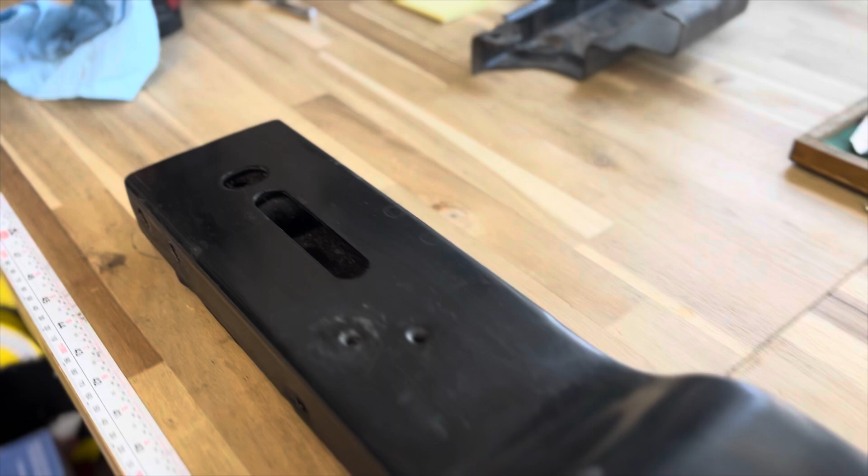Watched our first video in this little project? You might have remembered that I mentioned the center line of this cross member and where it lies in the frame is about 3 inches shorter than the Coyote truck that Jazz had over here. We measured off a known point, since the suspension on those trucks is interchangeable, off the front welded sub cross member to the center line of this. It was 30 inches on the 08, and it was 33 on the Coyote.

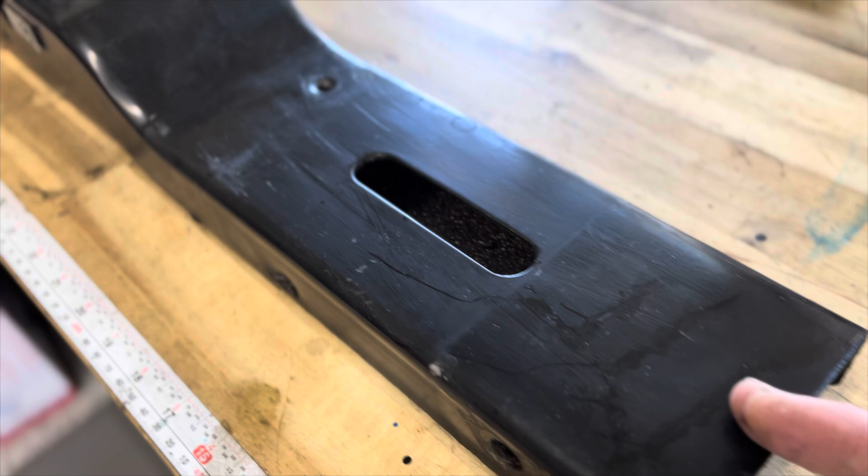Christian from Power by the Hour also verified a customer of his that swapped one of these trucks as well, had to do some cross member work. So obviously this is actually 4 inches, so if we go from center line, we're going to be out here.

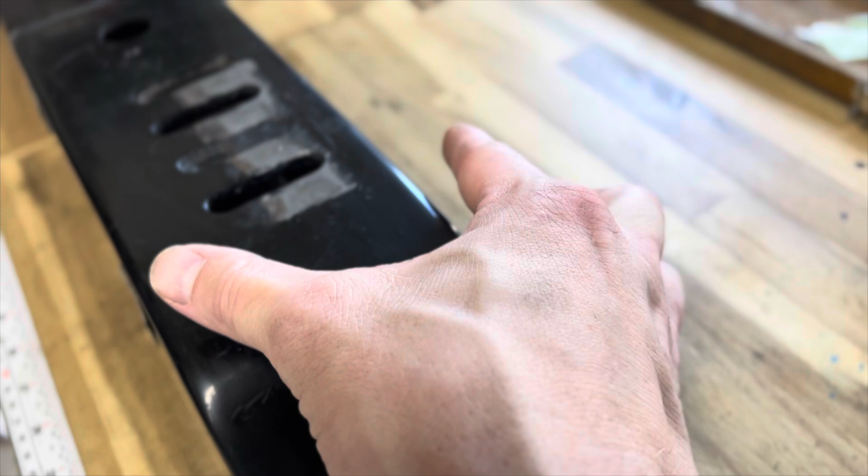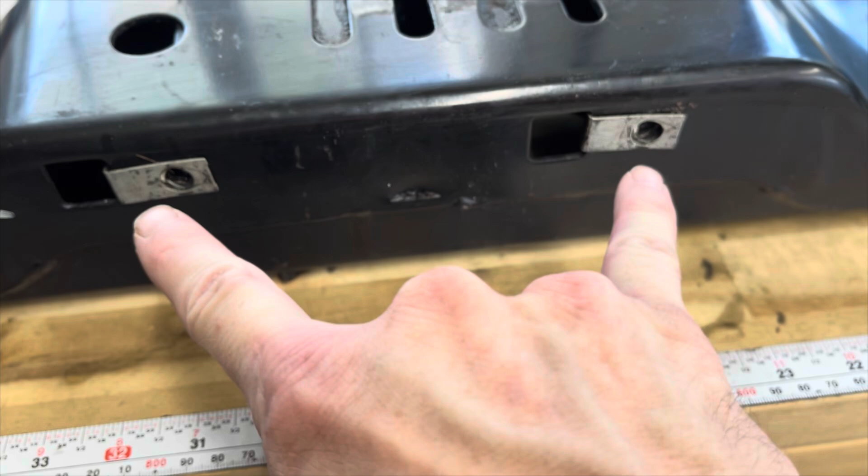Originally I was thinking about making a whole cross member, but then you have your exhaust shields that bolt here and your exhaust brackets that bolt there. So I'm thinking of a simple design, a plate here to extend the back of this. Actually, this is the back.

So we're gonna have to work around the exhaust and do that. I'm gonna scan it and see if I can't come up with a simple bracket to get some mounting points back here for you guys to have this swap just a little easier. Let's get to scanning.

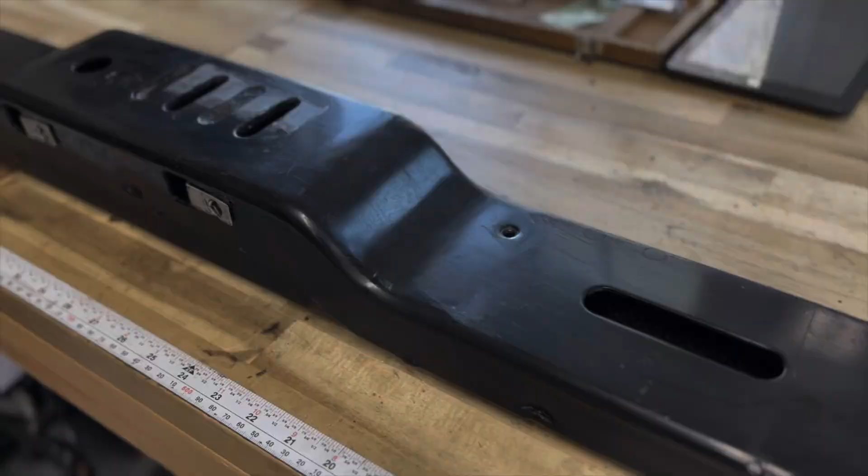So I took my crude scan using my phone, as you saw there, to get kind of a base solid for the original transmission cross member. As you can see, filling in there, I took hard measurements too with the caliper.

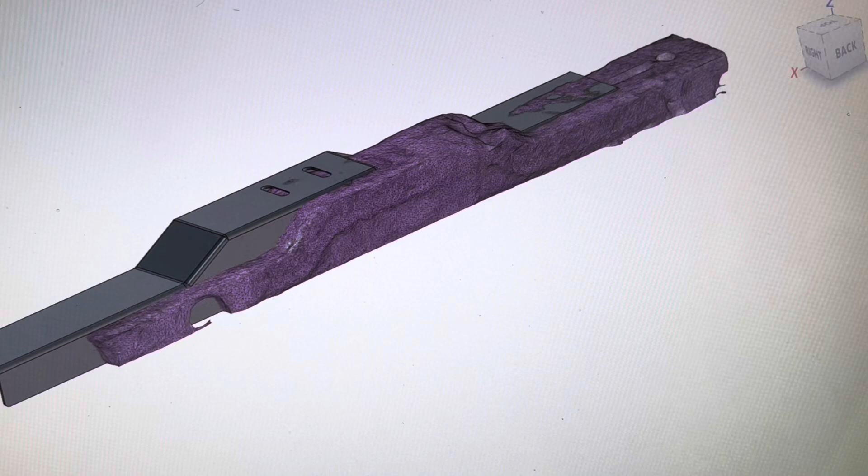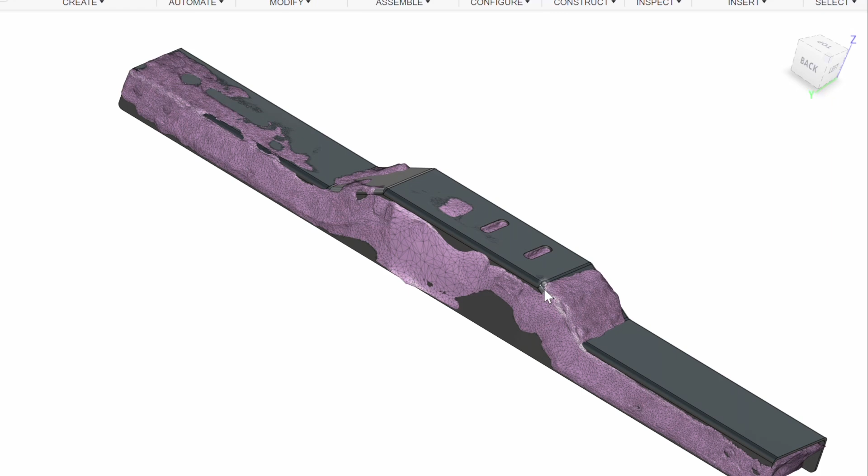So I actually did a screen grab on the computer, which is a little better than the phone. As you can see, a little better view of the representation, a little cleaner than the scan. And also here, we'll show the overlay of the scan model and zoom in on where you can see the J-clip that you might have noticed in the video.

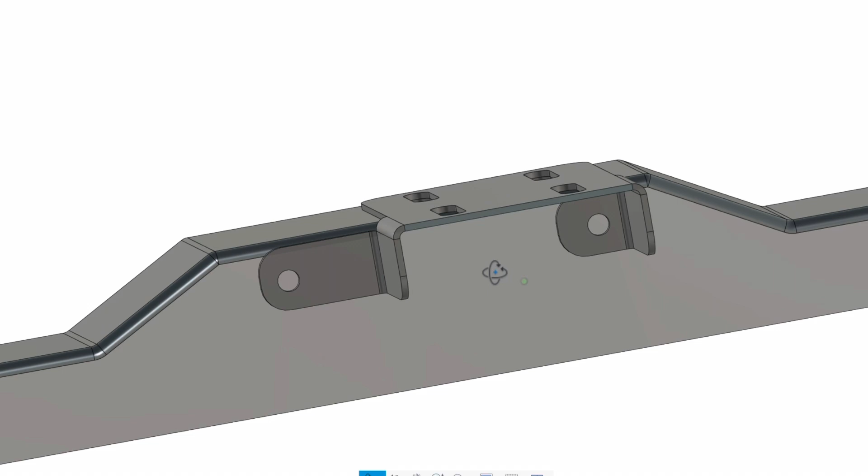So I decided to utilize those J-nuts in the back as a mounting point, and you can see me build the first revision of the transmission mount. Then after I built it alongside of the solid transmission cross member, I put it on there, and you can see kind of where it all fits up.

And it should be - at this point I didn't know that the exhaust bracket was going to be in the way, but we'll get to that later. All right, after a few hours or so during the day, I found to get that thing designed, as you saw, and made myself a paper template.

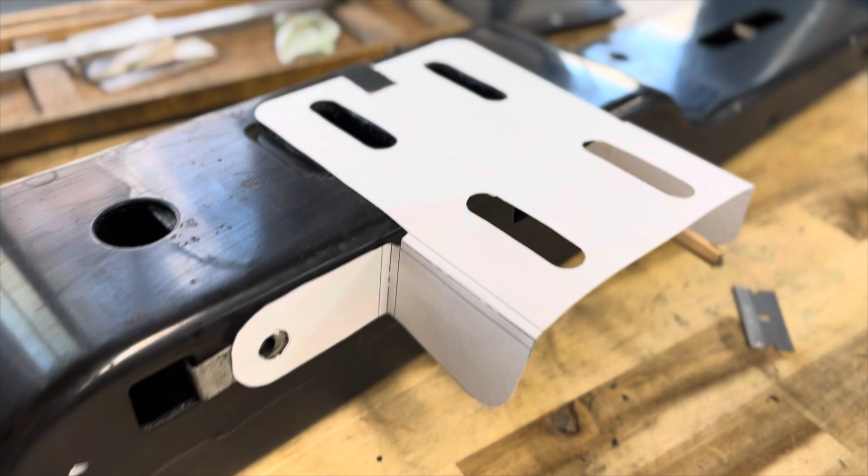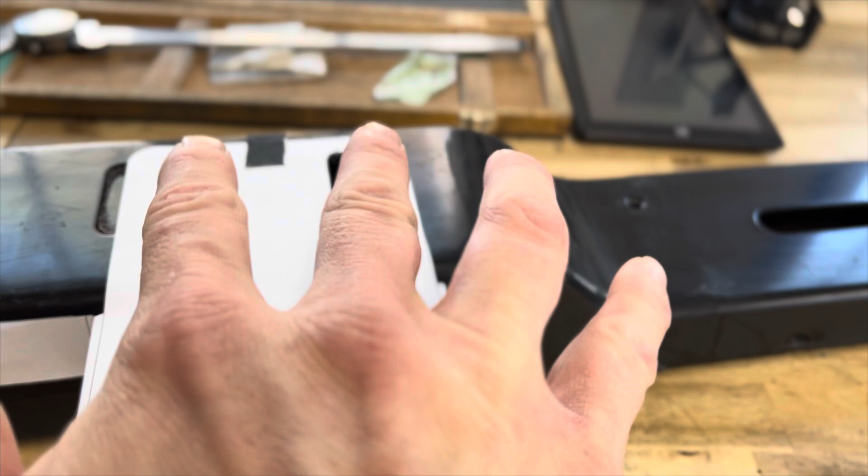So pending, I'm gonna buy a 6R80. I like to buy a 4-wheel drive mount too, just to see if the studs are the same, but I feel like it's pretty common - just looking at the cross members of the 09 to 14 F150s, these look the same, but you never know until you try.

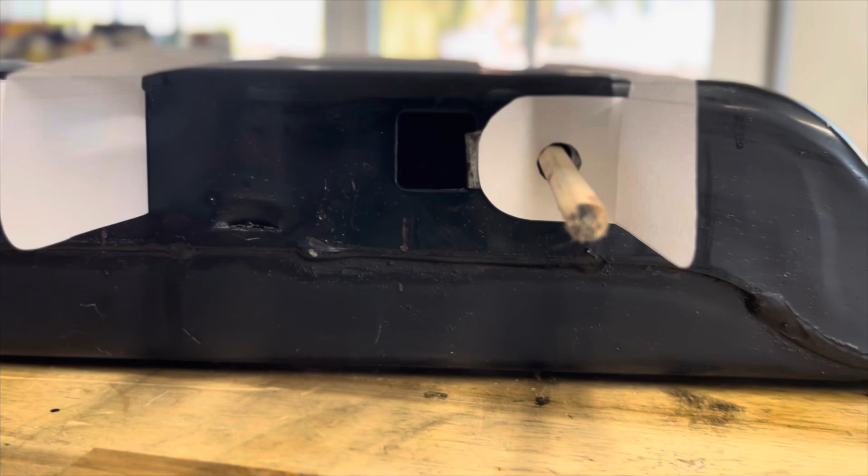And it looks like the 04 to 05s have an insert in here instead of a J-nut, and looks to be in the same position. I'll probably make that a little bigger just to make sure, but that's where the exhaust hanger is usually bolted to, so I'm hoping the slots are big enough, kind of sandwich it.

I gotta go double check and look at that piece to see what that looks like, whether it can be bolted - maybe, hopefully that won't be in the way, or it can be sandwiched between the cross member and the mount. So that's offset a little more than three inches, because otherwise the studs encroach in this and are basically useless.

So yeah, that's my little solution pending actuality. So that's, I think, a good starting point on that. Been told 3-valve mounts work, like I said in the other video. So that's pretty cool. Let's go take a peek at that exhaust hanger bracket and see if it's gonna be in the way or we can sandwich it.

So yeah, I want to double check the newer cross members, because I'm not sure what you're going to do with exhaust yet, but definitely can't sandwich that exhaust bracket in between here.

So I might just have to - because it's going to have to lay flat and it sticks out real far, like it's ribbed and all that stuff - it's going to have to be redesigned of sorts, but we'll just kind of go with this for now.

I do think I might be able to get away having this behind it, and this being sandwiched in between the exhaust bracket, making clearance here for it one way or another, or doing some creative bending. This side might be okay. I think it's this side.

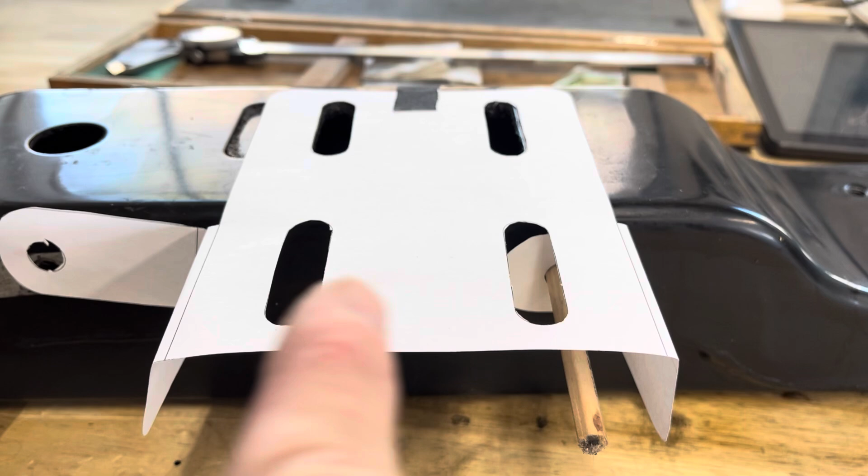Maybe just omit that side and then it'll all be kosher. Then you get into the area of the studs from the relocated transmission mount getting interfering. So I'm not gonna make any metal things yet until I kind of see where everything falls into place. All right, I decided just to grab that thing off. It's only held by one hanger.

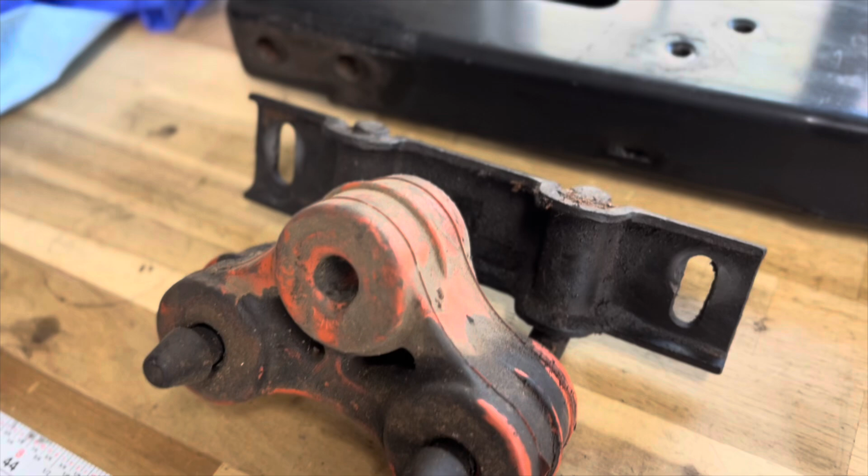Definitely gonna have to modify the design a little bit. Like I said, this side will be definitely okay. That side, definitely not. I gotta see if this thing goes in like that or that, because gravity did its thing and it was hanging like that out of the truck. But if it's like this, perfect, because then I'll just make a flange, extend it over here, and then have a bend down there to have it be sandwiched in between the exhaust hangers. So let's go see how that thing hangs.

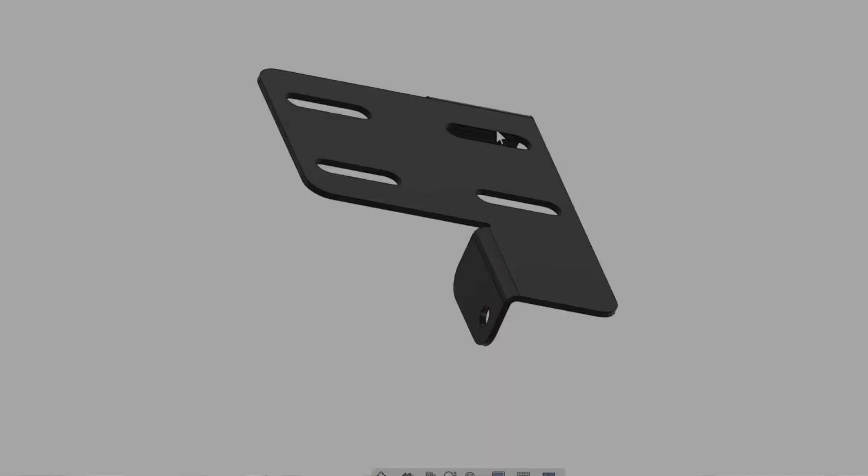If you ever try and find something the way it is on YouTube or anywhere else and you just can't find it, let me show you how I figured out that these are actually down on the truck, and all I have to do is modify that flange. So I'll update that and then show you a new piece of paper, so I don't go through a step-by-step process.

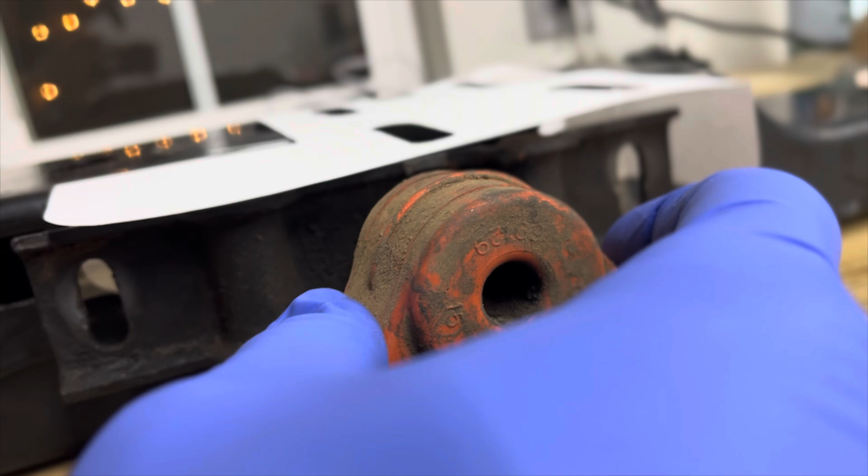If you know CAD, you know CAD. If you don't, time to learn. As you can see, made a pretty simple modification there to have that flange go down and behind against the cross member. And just like that, we got our revised paper template, and the mount should fit under there just ever so nicely.

Got some action down there. Now, hopefully your stud doesn't come too close to there. It should land somewhere in the middle there in the slot. And there's still, you can get to it with a wrench. So I think that's a success.

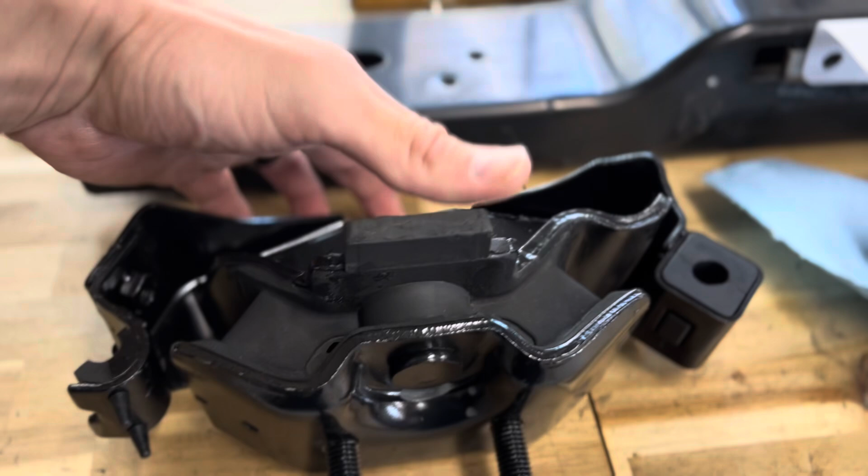Not too bad. All right, I went ahead and got a transmission mount from a 6R truck, 2-wheel drive, because that's what we're gonna swap it into. It'll sit in there like that, and oh, it looks a little tight. So this is the same slot as the factory ones up here. Nope, it's gonna have to be a little skinnier. So the bolt spacing is gonna be just a little narrower.

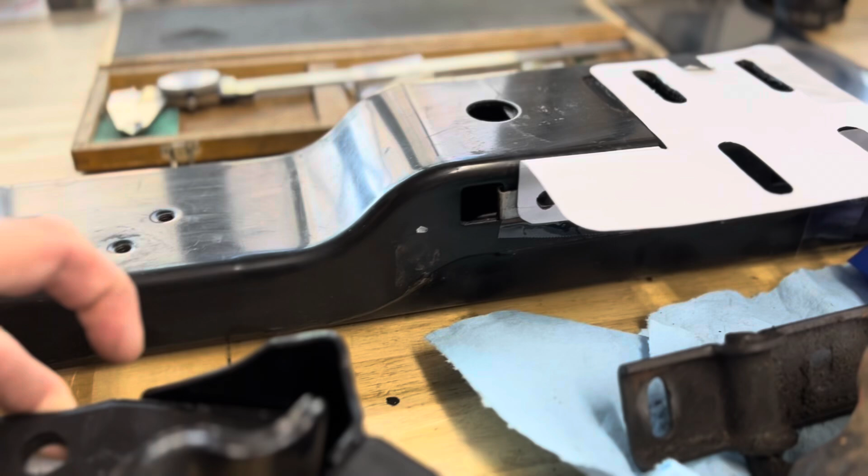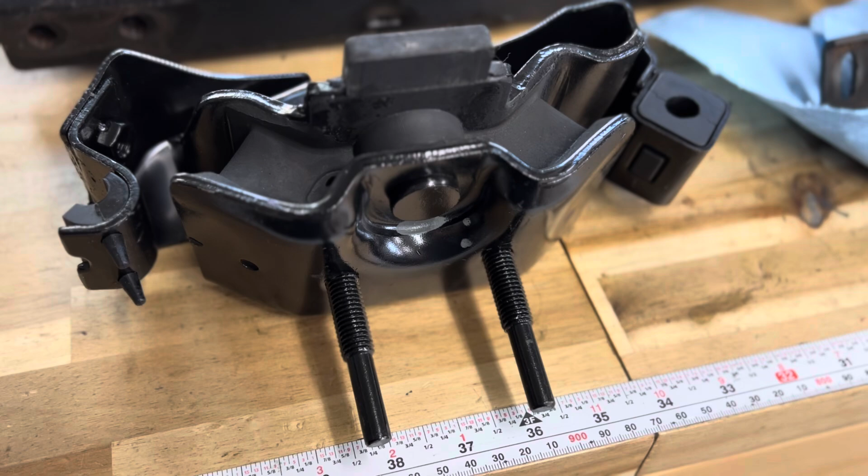No big deal, we'll change that design. No need to show you that, but I'm glad I checked. So that's the first mechanical part I've bought for preparing for the swap. I've bought a whole bunch of the connectors that I'm gonna need. So yeah, we'll change that design and we'll be ready when we need to make a real one.

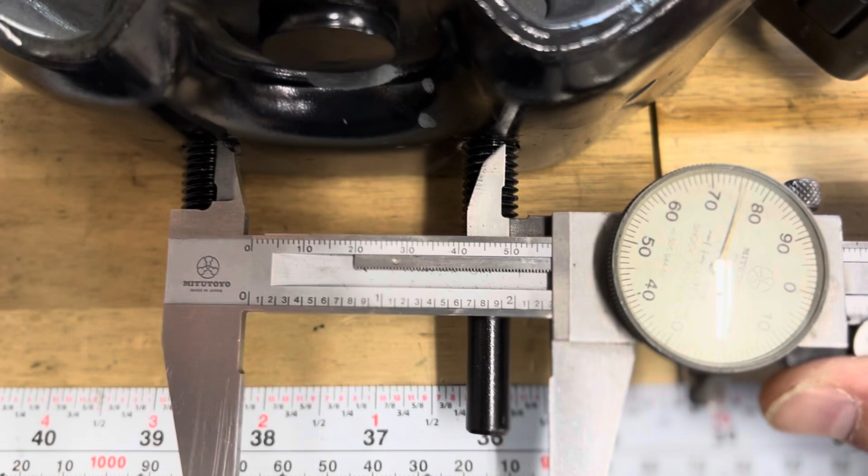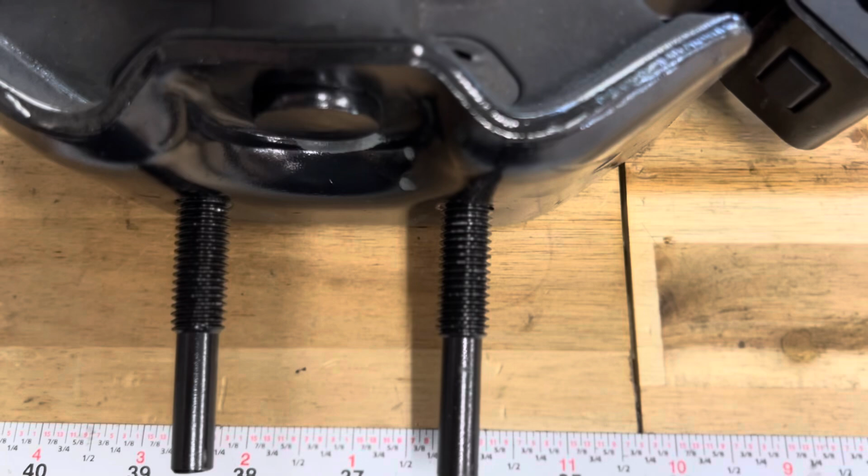All right, after looking at this thing more, I put the caliper up to here, and I'm fairly certain that's the same exact measurement, 2 3/8. But you get down here, and it looks like that stud's bent. This is what I get for going aftermarket, not Ford.

Yeah, so I think that stud is definitely bent. Wonderful. So I'm gonna take the measurement at the base and double check the CAD, but yeah, I think not a huge deal. We'll adjust accordingly if we even have to. Yeah, just gotta bend that thing. So that's what you get for aftermarket. It is an O'Reilly special. It does have a lifetime warranty, so if you ever tear one up, you get a free one, but it'd be a pain in the ass to squeeze that thing in there.

So no big deal. Well, I think I'm gonna wrap it up there. We're not gonna make a metal one yet. I am going to keep this template around, throw the crossmember back in the truck for the time being, because we still haven't found a drivetrain. We're actually probably gonna pick one up in a couple days here. When you see this, it'll probably be a day.

But yeah, that's how I'm gonna solve the crossmember difference between the 04-08 and the 11 to 14, which I'm fairly certain the 09s and 09 and 10s are the same, but because of the 6R, I'm guessing they moved it back in the frame. So that's gonna be my little solution to come up with that 3-inch difference that this is gonna be short on. And I also still wanna get a 6R mount and make sure the stud spacing is the same too. In the meantime, I can do that as well.